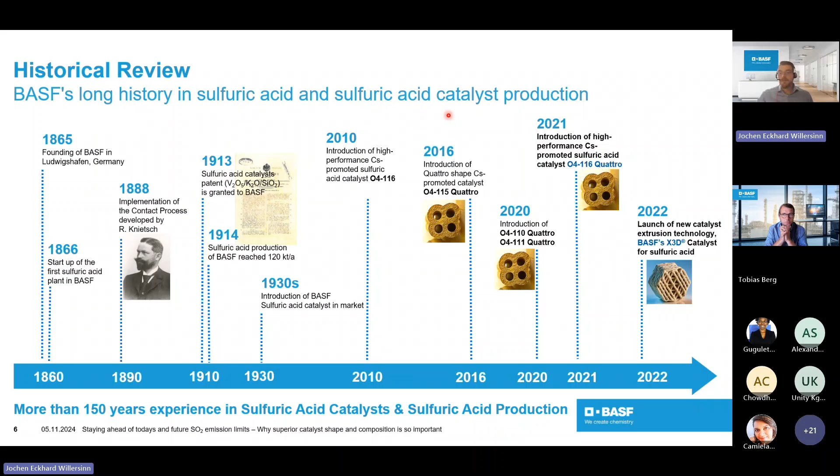So this is basically more than 150 years of experience in sulfuric acid catalyst and sulfuric acid production, which will benefit you to increase your capacity and also reduce your emissions.

Moving on, I already said we are a global company for producing sulfuric acid. You can see here where we are active in terms of sulfuric acid production. We have two sites, one in Germany, one in Shanghai, where we produce the catalyst for the sulfuric acid. And we have more than 13 sulfonation sites or sulfuric acid sites producing sulfuric acid for captive use only, all over the world.

And since this is about new geometries, I will mainly focus here on Quattro catalysts, so our high performance catalyst family. And basically the reasoning why we changed the shape from the star shape, you might all know, to a new shape is that there's different things to influence activity and also performance of a catalyst.

First thing, and this is quite obvious if you compare this to the old star shape catalyst, is the shape itself. If you change the shape, you will have a different performance of the catalyst. The shape mostly influences the pressure drop and the geometric surface area. So this is something where, if you change the shape, you always have an impact on your pressure drop in the plant and the surface area, which relates to the activity.

Secondly, what you can do to influence the activity is to work with the carrier materials, the material the catalyst is actually made of, for the majority. This is a material which is porous. And you can see here, depending on how porous the catalyst is, you have more accessibility of active sites and more surface area. But if you compare this maybe to a stone versus a sponge, when you have too much surface area, you end up where the catalyst gets brittle, so mechanical strength goes down.

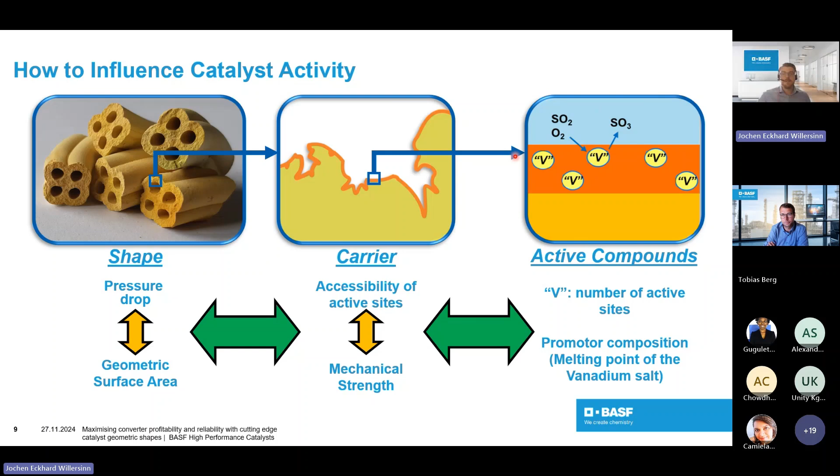So these are three things that could be regarded separately, but in real life all three of these topics are closely related. It's quite difficult to just change something and expect that all the other things will not change. But we figured out there is a way to make things a bit better with our Quattro catalyst. You need to figure out how this works in terms of geometry.

When you go down to this image here showing big M&Ms on the left-hand side and small M&Ms on the right-hand side, filled in a jar, this will be our model reactor, so to say. You have big catalyst pieces, you have small catalyst pieces, and we look at what happens during this reaction. For big pieces, you have a low pressure drop because there's high porosity, lots of void spaces. The gas can flow quite freely through this bed. You have a low packing density.

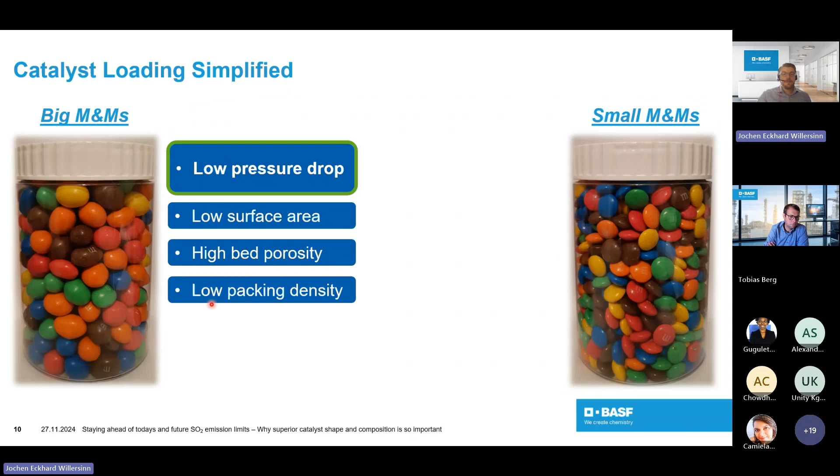You have a low surface area. This low surface area also relates to a lower conversion, because there's not enough active surface area which helps you convert SO2 to SO3. Small M&Ms on the other side have a high pressure drop because they have low bed porosity, a high packing density, so the bed is really tightly packed. There's much more pieces in here than in there. But because you have more, you also have a high conversion.

The point is, you cannot just mix and match and get to the ideal spot. If we want a catalyst with a very low pressure drop and a high conversion, we need more complex shapes. We need to move away from the standard shapes we knew before. We need to invest time and effort and R&D work into getting more complex shapes. This is what our Quattro catalyst combines.

If you see a historic overview of what was there before: the ancient pellets with a very high pressure drop but lower activity, moving on to the rings which were a bit better in pressure drop and activity, and to the old standard, which are the star rings. Our Quattro catalyst, with its improved shape and higher activity, managed to get to a significantly higher activity without sacrificing anything on the pressure drop.

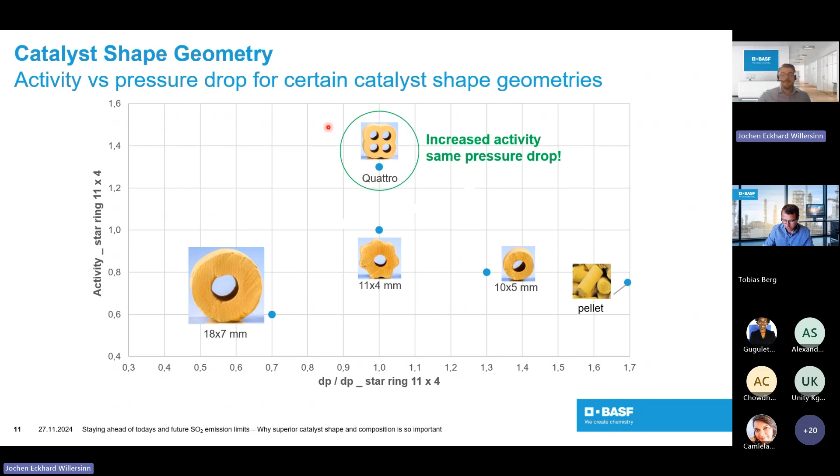So we have the same pressure drop for this catalyst geometry, but a significantly increased activity. And we didn't stop with just the activity. We also optimized our shape in such a way that the catalyst is even stronger. So I can summarize here what this catalyst is actually capable of.

We have a 30% higher geometric surface area, which means we also have much higher activity of the catalyst. More importantly, the side crush strength of this catalyst is increased by 50%. So the catalyst is much harder and is less prone to break. And we have a lower attrition.

That's quite easy to understand if you compare a ring like a star shape with edges, which can easily break off. This catalyst has a very much rounded shape, which is less prone to get abrasion. So we have 60% lower abrasion of this catalyst.

And the loading density is the same. This is also very important, so you don't need to buy more catalyst in terms of weight to get your reactor filled. It's the same loading density as our star rings are. And more importantly, also no pressure drop increase, which is a huge benefit. So the catalyst combines all the benefits without sacrificing on loading density and pressure drop increase.

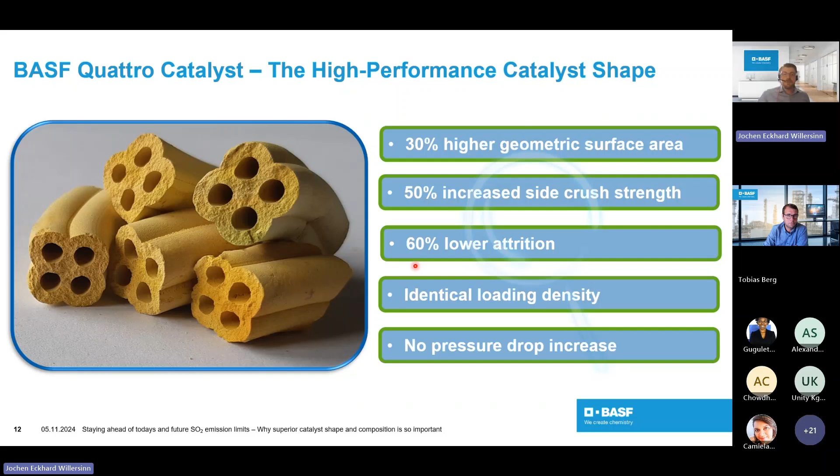Moving on. So with this technology, it's always important to show what this technology actually can do. I will focus here a bit on the improved geometry and what you can do with it.

This improved geometry gives you a higher surface area because you basically have more surface where the reaction can take place. This leads us to two different ways to benefit where the conversion equilibrium, the maximum achievable conversion of this reaction, can be reached at an earlier stage.

What this means for you: you can either decrease the bed height of the reactor and keep the same conversion because you have more active material present, which means you can reduce your catalyst amount and still have the same active material present for your converter bed. We've seen that we can decrease the loading of the catalyst by 10 to 20% and still keep the conversion at the same level as before.

On the other hand, you can also keep the volume the same as before, exchange your old catalyst with quattro catalyst, and increase the SO2 load, which means the capacity. You can run at higher SO2 loads and increase your capacity by 5 to 10%, provided your heat exchangers are capable of removing the energy. With this, you can increase capacity significantly without further changes, just exchanging the catalyst shapes from stars or rings to quattro, and have up to 10% higher capacity with your production.

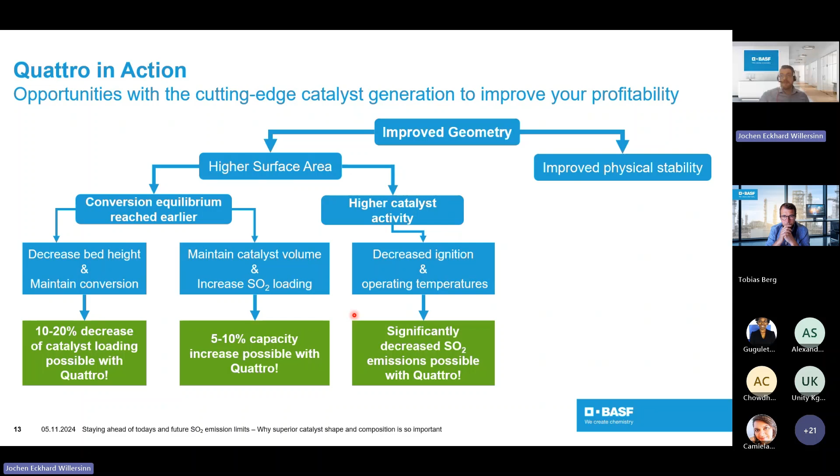On the right-hand side, the improved physical stability gives you less sieving losses, longer catalyst lifetime, less unplanned shutdowns because of pressure drop increases, and overall OPEX reductions due to decreased replenishments with the catalyst. So it's a very versatile catalyst and offers a lot of different benefits for you and your businesses.

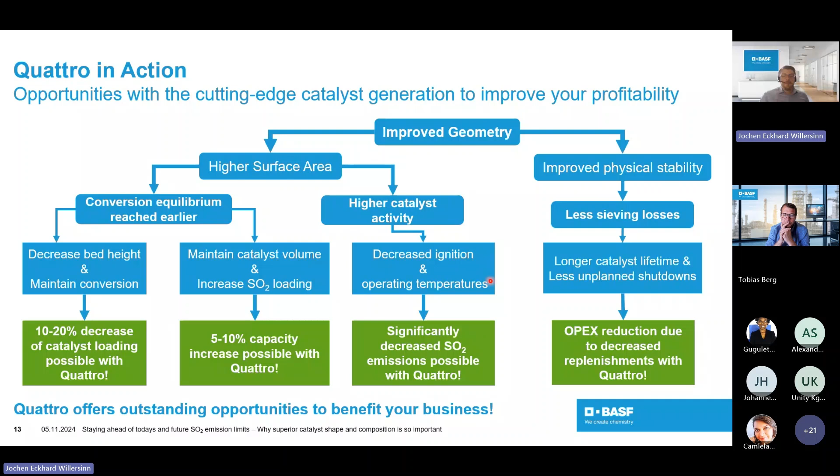And today, we just want to focus on the decreased SO2 emissions, which are possible with our quattro catalysts.

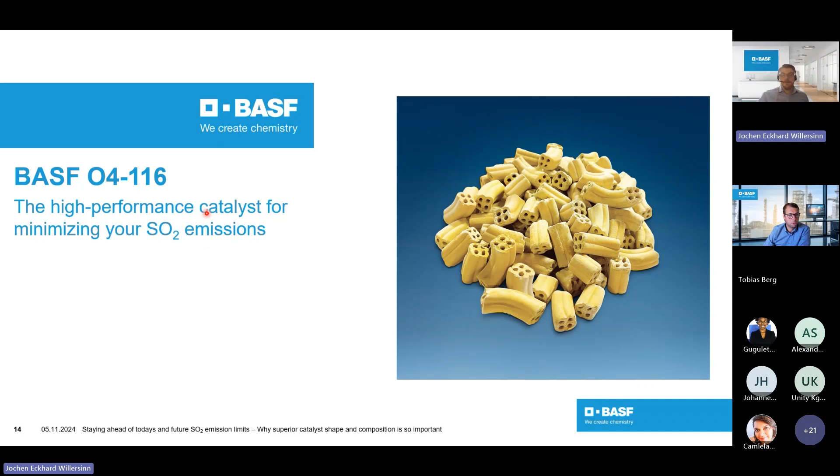Why is there a need for a more powerful catalyst? In principle, there are decreasing SO2 emission limits coming from governments, which is a key driver for converter improvements and catalyst improvements. The historic evolution was basically since the ratification of the Helsinki Protocol in 1985, the limit for SO2 emissions we are allowed to emit with our reactors is decreasing constantly. Especially in Europe, there might be even newer and stricter limits coming into effect by 2030, which means we need more powerful technologies to decrease SO2 emissions.

Here's an example of what was happening over the past 15 to 20 years in Germany. You can see, especially for single absorption plants but also for double absorption plants, the emission limit they are allowed to emit significantly decreased over the past 15 years, forcing plant operators and producers to invest more and further into their reactors.

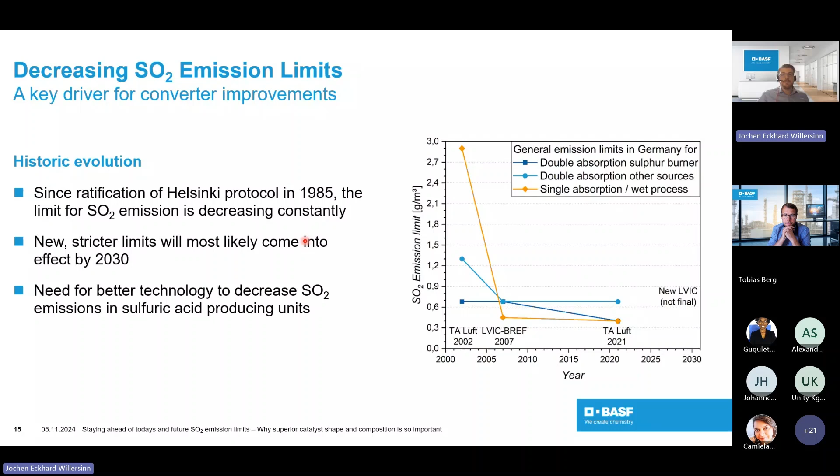Cesium catalysts here play a crucial role because we need to decrease the temperatures to get higher conversion rates and therefore lower emissions. So we need more powerful low temperature catalysts.

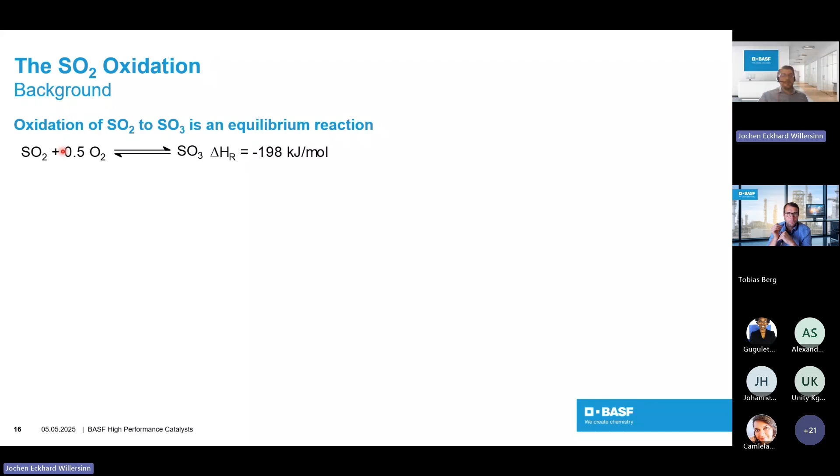And why do we need that? I'll give you a brief overview of the oxidation reaction. The SO2 oxidation is an equilibrium reaction, meaning the reaction can move in both directions depending on parameters, and the pathway depends on several factors: temperature, gas composition, and partial pressures.

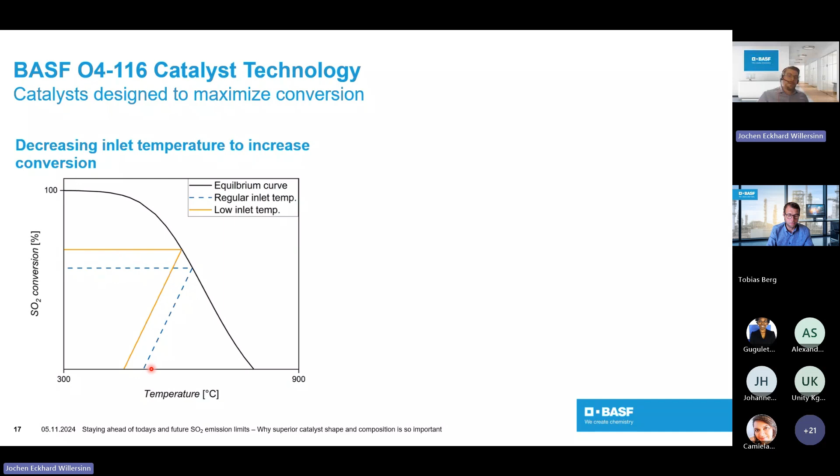For this, we need a catalyst designed to be operational at low temperatures to increase conversion. If we see a catalyst operating at a normal temperature, let's say 420 or 430 degrees, you'd have this exothermic reaction, SO2 getting oxidized to SO3 with the catalyst, and you end up with a conversion of roughly about 60%.

But if we reduce the temperature of this reaction to 390, 380 degrees, you see the same exothermic reaction, temperature increasing, but it takes much longer to reach equilibrium - the state where the backward reaction to SO2 and oxygen is as likely as the forward reaction to SO3. We end up with a significantly higher conversion rate for this catalyst. So having a lower inlet temperature is key to minimizing emissions.

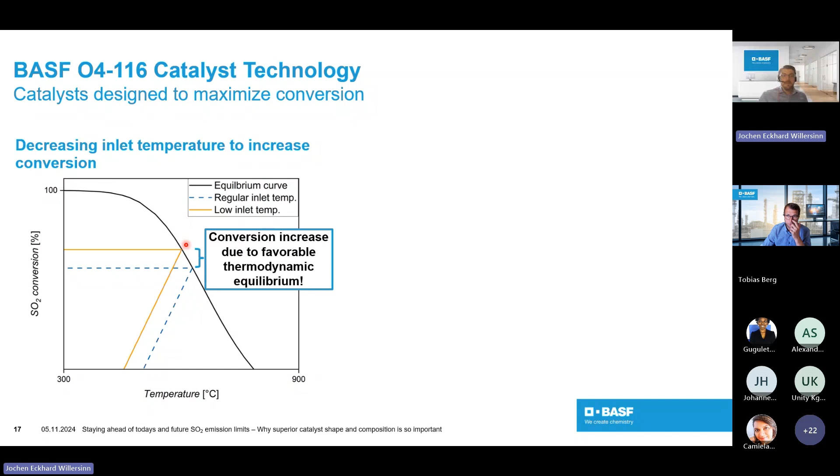Basically, what we did with our 116 catalyst technology to achieve this: we increased our vanadium content and improved our promoter mixture using potassium and cesium. Cesium is a key factor to reduce the operating state of this catalyst to below 400 degrees centigrade, and we optimized this mix to ensure the highest activity and conversion at low temperatures.

What we also did is significantly improve the carrier composition, so we have higher porosity and pore size distribution, meaning a higher mass transfer rate at very low SO2 concentrations. This is crucial after intermediate absorption steps where you have very low SO2, high oxygen, and no SO3. The limit of this reaction is not just thermodynamics but also kinetics - the gas moves into the active phase, reacts to SO3, and then gets carried out of the active phase.

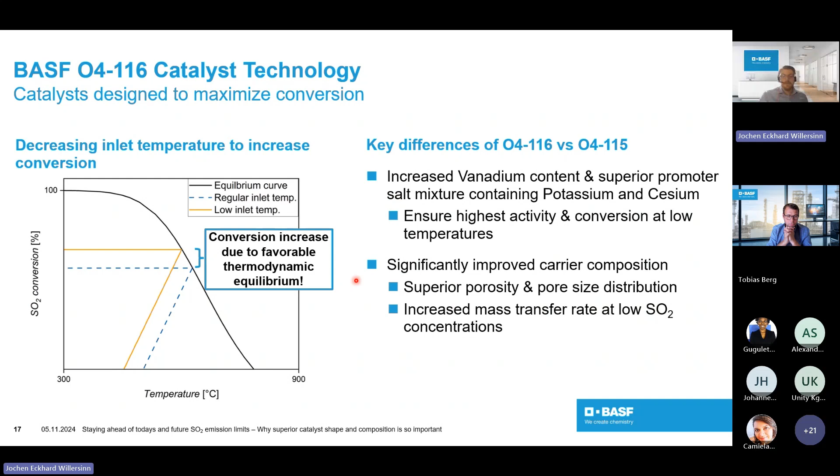Just to give you a sense of what it means to have a different pore size distribution or different carrier material, I was looking for a nice example. Surface area and porosity is quite interesting when you look at volcanic rocks. I had the pleasure to be in São Miguel in the Azores last year and found some very interesting rocks that nicely visualize what I mean by different surface area and porosity.

When we look at this lava rock 1, you see it has a rather smooth surface. You see some big pores here, but a very low amount of small pores. Surface area overall is quite low because we only have some of the big pores. This piece of rock was actually quite heavy and very robust.

On the other hand, this is the second rock I found on the same beach, and you can see already a stark contrast here. This is very open-pored, very rough, has high porosity, high internal porosity with a lot of pores inside, very high surface area going into this rock, not just on the surface. This piece of rock was very light - maybe a fifth of the weight of the first one. So very light material, very porous, and had a very high surface area.

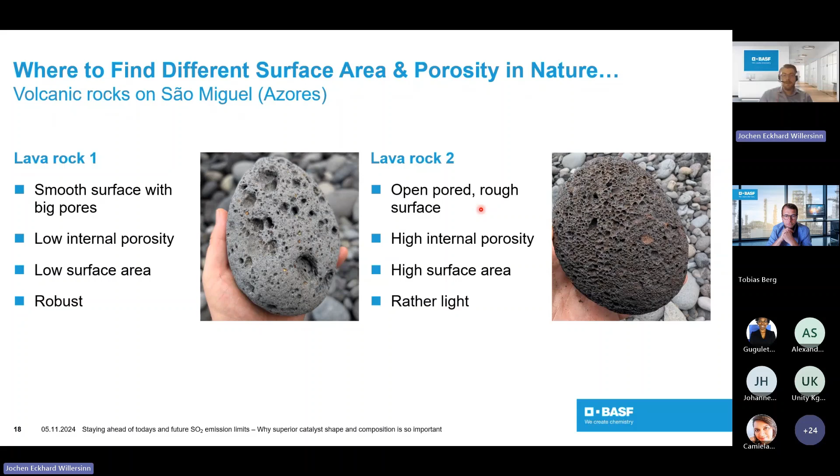Both of these are the same origin - they're both lava. The difference is how fast the lava was exposed to water and the exterior gases. The enclosed gas bubbles either agglomerated and moved out, which is why you have these big holes, or they solidified immediately and you have a lot of small cavities from the small gas bubbles.

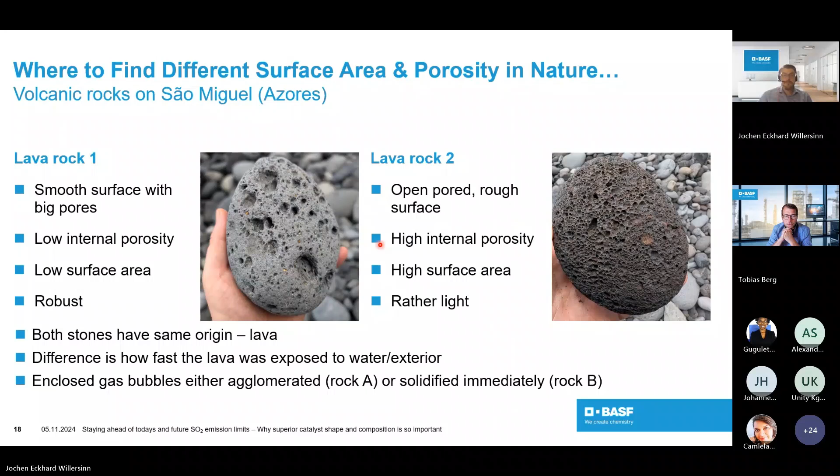With this example, how can we translate this to our catalyst? We need to look at our diatomaceous earth, the carrier material, which is important for our catalyst properties. I have three examples for you of diatomaceous earth as a natural product.

These are actually fossilized shells of silica algae in various shapes. They come from prehistoric times and are mined. They can have very different shapes - the shapes I show you here are disc-like, rod-like, and cylindric shapes. Depending on how you combine these shapes together, you can have a significant impact on key catalyst properties, which is very interesting.

So the way you combine it, you can increase your strength. You can change your operating temperature, make it higher or lower. You can change the surface area, which is quite obvious here because you have a lot of different porosities. And you can change the activity, which is closely related to surface area and porosity.

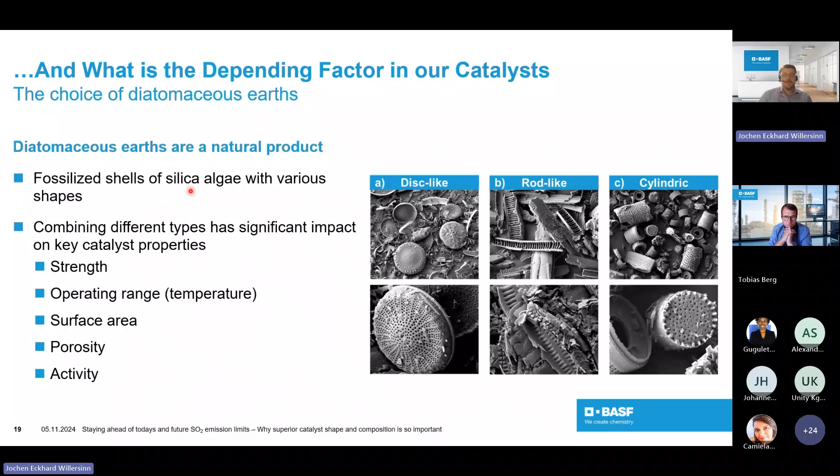And if you combine these key figures smart, you will have a catalyst that has a high activity at low SO2 concentrations and low temperatures. And this is what our O4-116 looks like.

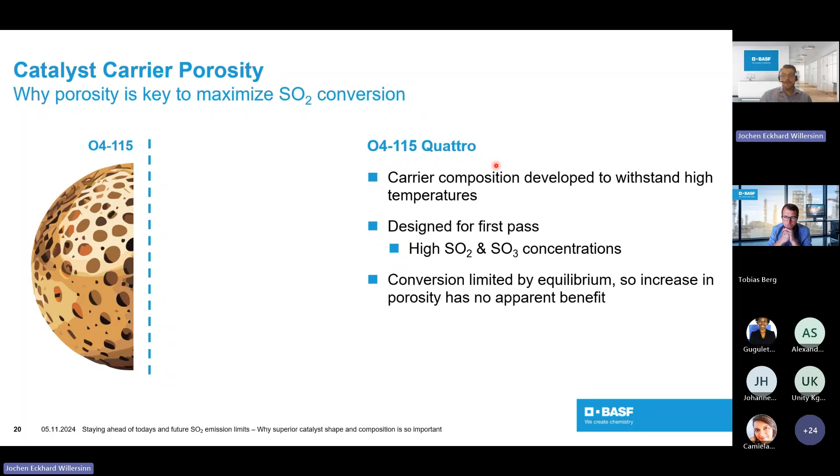And when we now compare this to old cesium-based catalysts, which were designed to be very sturdy and be able to also operate on the first bed at high SO2 and high temperatures, the carrier composition here with the O4-115 was developed to withstand high temperatures, first pass, high SO2, high SO3 concentration. The need here to have a highly porous and active catalyst is not so high, because the conversion limit is actually the equilibrium, the temperature range, not how much gas we can get into the active surface and out of it. So having an increase in porosity has no benefit.

On the other side, the 116 Quattro, we designed for the applications after the intermediate absorption step, where SO2 is low, we have very low SO3 to none, and we have a high oxygen ratio. The conversion here is limited by the rate of diffusion of the reactants into the active mass. So the structure of this catalyst has to be more favorable for internal mass transfer. We need it to be easier to get the SO2 and oxygen into the surface and the SO3 out of the surface as fast as possible.

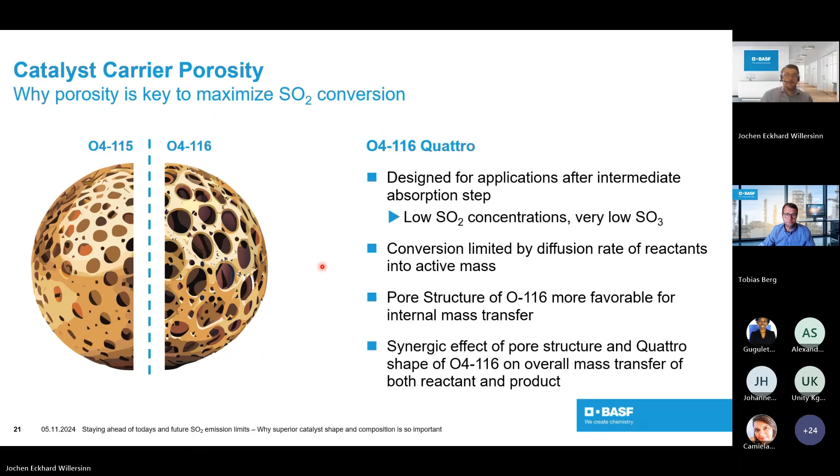And with our recipe and also with the benefit of Quattro, we observed that we have a synergistic effect of those two, which means that the mass transfer and also the activity of the catalyst is significantly higher than you would just look at the two things separately. And this is something you can see here already.

It's a lot of numbers, but when you compare our standard star ring catalyst with the high performance Quattro catalyst for the 115, for the standard cesium promoted catalyst, you already see with this higher surface area, you get a decrease in your ignition temperature for the 115 by 10 degrees, down to 330 from 340. And the operating range decreasing to 375 up to 630. So this is a significant decrease in the operating range.

Same here is true for the 116 Quattro, but to a much more extended state. So we can even decrease the ignition temperature down to 320 degrees centigrade, and further decrease the operating range to 365 degrees centigrade, which means the catalyst is active and does actively convert SO2 to SO3 at this low temperature range.

And in summary, the superior carrier material composition leads to this higher activity. We really optimized this catalyst for low temperature applications, which you can see here, it's very low. The ignition and operating temperatures of the Quattro catalyst versus the star rings show that there's a synergistic effect. So from star ring to star ring, you just have a 10 degree reduction, whereas when you go from star ring to Quattro, you get 15 degrees.

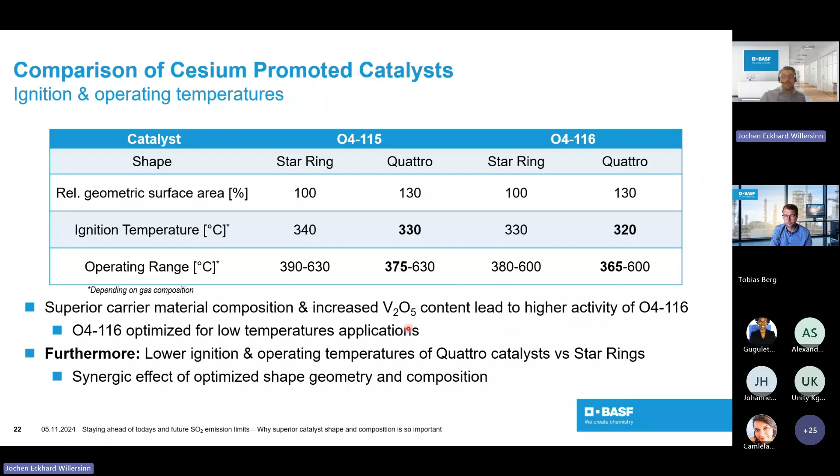Good, and how does this pan out in terms of kinetic rate? So we can also see for the Quattro catalyst, at lower temperatures we see a higher activity versus the 115, at very low temperatures between 20 and 40%. So the catalyst is significantly more active at much lower temperatures than the standard cesium catalyst would be. At higher temperatures, this is leveled out a bit, so we're just down to 15 to 20%.

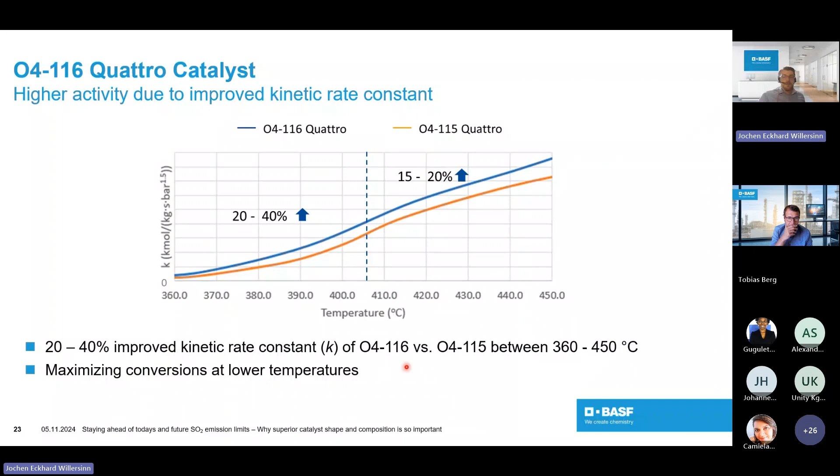This is because of thermodynamic contributions, making it a bit less pronounced. But overall, we can say we have up to 40% improved kinetic rate, which means this is maximizing the conversion at low temperatures.

Good. Before I go to the example, are there any questions about the 116 Quattro?

We have received one question, but actually, Jochen, you already answered it. So it was about the strike temperature, but you referred to that already. Consider this one done. And then I just received another one.

What was the gas composition for the kinetic data on slide 23? I have to look that up. Usually we do this at a composition of, I think, 7% SO2 and 10% oxygen, something like this. Okay, thank you so much.

This is it for now. Okay, good. Then let's move into the example where we're showing the emission reduction upon plant startup. I'll talk a bit about the details. This is a double absorption plant with 4 beds, with an intermediate absorption tower after bed 2, so a DA22 unit. It's a zinc smelter in Europe.

We have a rough daily capacity of 1,080 tons per day. Average gas composition is around 130,000 norm cubes, bit below 8% SO2, 10% oxygen. Target conversion of this reactor is 99.9. And the important thing here, especially in this part of Europe, they have an annual emission limit contingent.

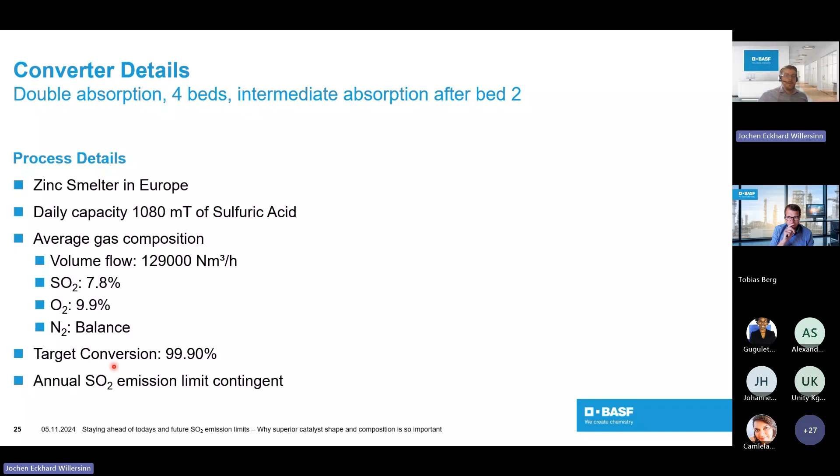So they have an amount of SO2 in kilograms they are allowed to emit. If they exceed this, they get into trouble. And as we all know, startups produce the most amount of SO2, so the goal is really to reduce the emissions upon startup after shutdowns, which are hot or cold. During this project, we decided to implement a cesium layer in the third bed to decrease the emissions upon startup, to really go down with the emissions.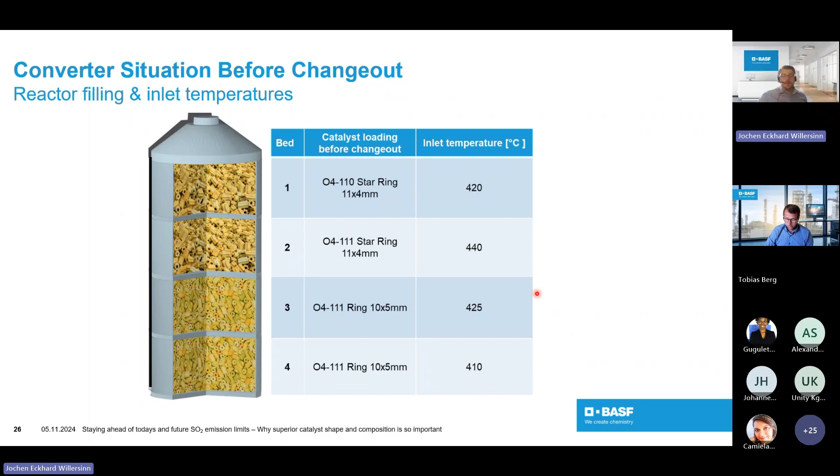When we look at some of our performance measurements that we did in Jan 2022, we could see that basically we achieved a conversion of 99.89%. And we could see that performance in bed 3 was not so good, as well as bed 1, but this is basically because of the age and should be exchanged in any case. So we recommended an exchange of bed 1 and 3 to regain the performance of the unit and to go with the ignition layer in bed 3.

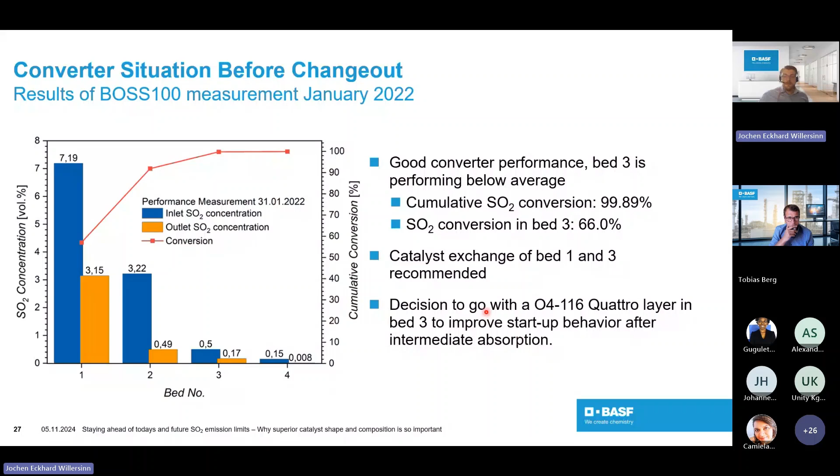And this is what the plant looked like afterwards. So what we did, we put in a fresh layer of fresh set of catalyst in bed 1, and we also replaced bed 3 entirely. The majority of the bed, 70%, is still 111 Star Ring. Why didn't we go for Quattro here as well? Because we really wanted to see just the benefit of the 116 Quattro, and not have it overshadowed by the other Quattro catalyst. The remainder, bed 2 and 4, remained the same.

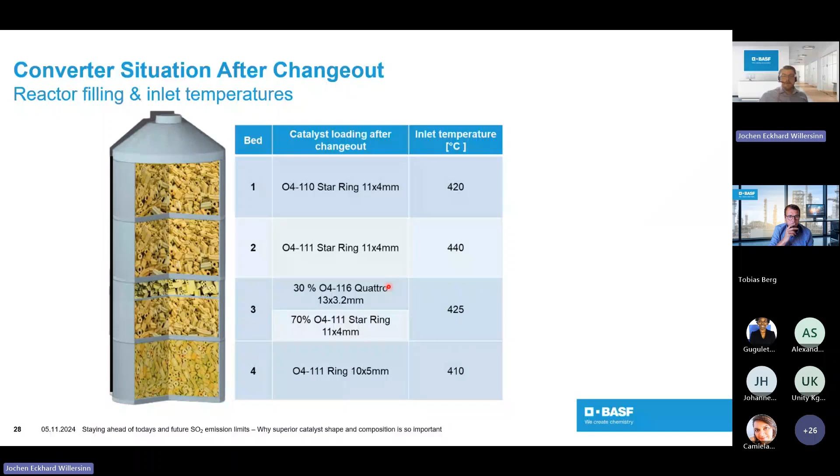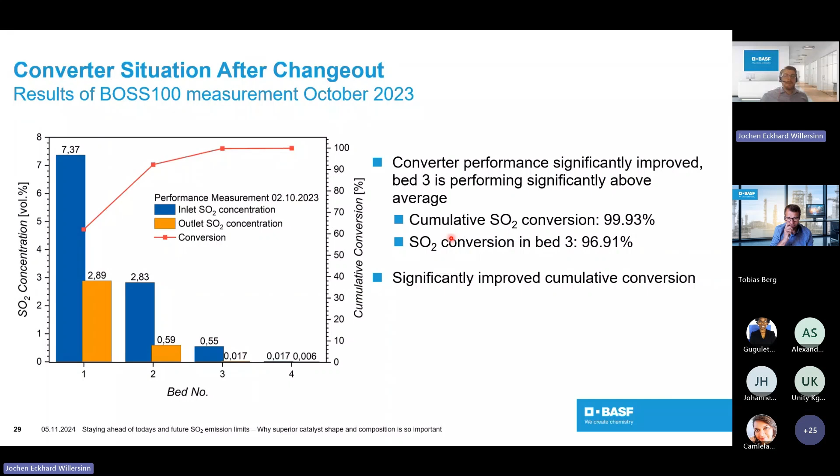After the change out and after almost a year in operation, we did some performance tests again. And what we could see here already, the exchange had a significant impact. The conversion overall increased to 99.93, and the conversion bed 3 was 96.91. So we had a significantly improved cumulative conversion, but also the separate conversion bed 3 was very, very high, which is good. But it gets better when we look at the startup behavior of this reactor.

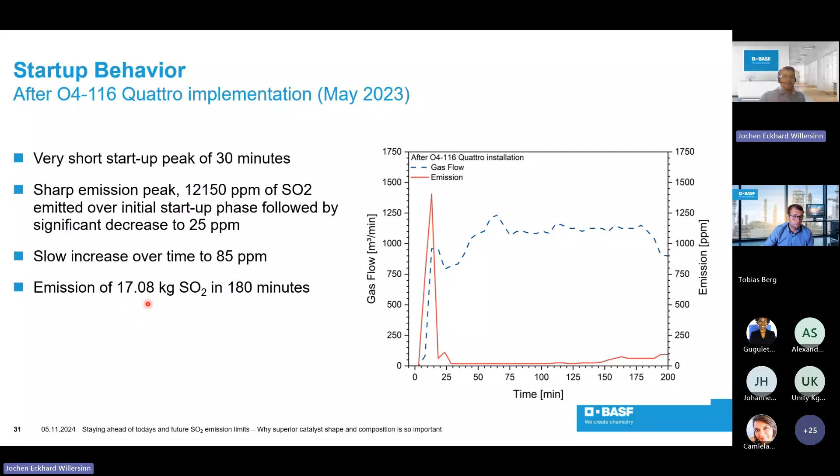So we could see that directly after the ignition layer in bed 3 kicked in, we could catch the emissions down to a level significantly less than before. To sum this up, we only had an emission of 17.08 kilograms in these 180 minutes, which is a significant decrease in emissions.

So when we compare those two different startup behaviors before and after the exchange, we can see that the emission reduction over these two periods of 180 minutes was decreased by 82%. Relatively, 77.6 kilograms of SO2 could be avoided from being emitted to the atmosphere, which is a great benefit and really helps the customer get down to the emission limits.

Furthermore, what we could see here is that this third bed displays significantly increased activity at 350-degree inlet temperature. So when the plant was started up, we could already see significant activity in bed 3, which was not observed in all the startups before. So also the contribution at this very low temperature made it possible that the reduction in SO2 emissions was so significant.

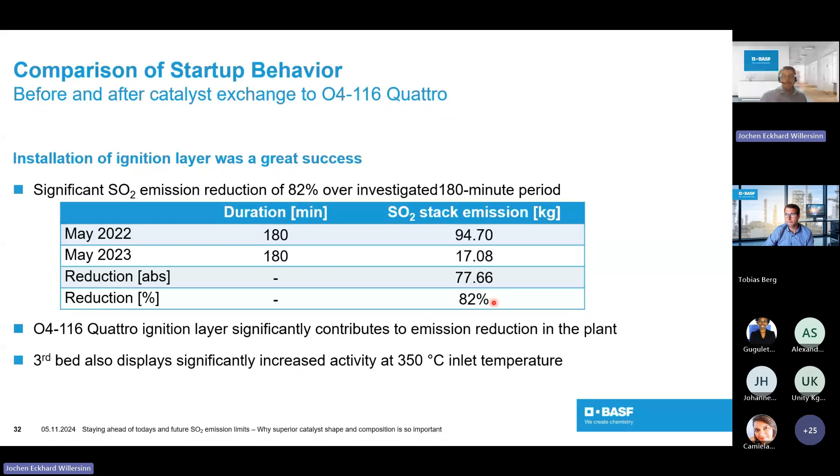Good, let's sum it up. So what we could do here in this exercise was successfully implement our 116 Quattro catalyst as an ignition layer after intermediate absorption. We could increase the conversion up to 99.93%, and the most important thing is that we can decrease the startup emissions by up to 82%.

For the client, he's very satisfied with this result because it's a major contribution to tackle his emission targets.

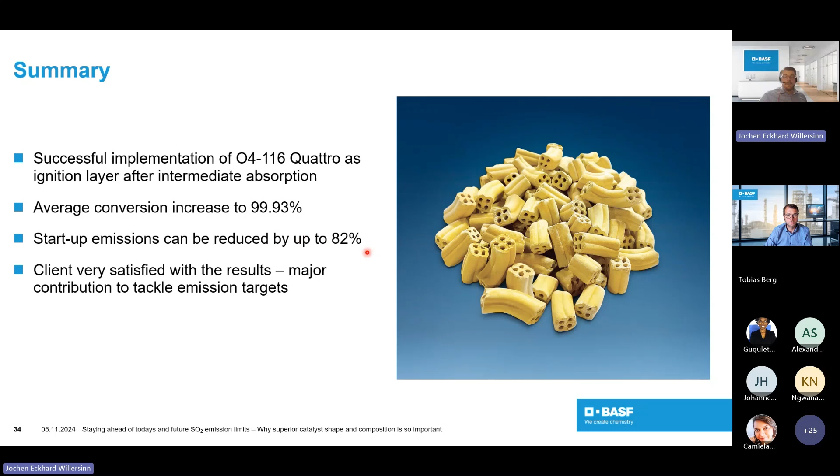One thing I have to say here, this emission reduction is of course also only possible if you have good startup procedures and you stick to them as best as possible, because if you start the gas when everything is below ignition temperature, you will not get to this emission reduction. So you also need to have your operational excellence really on top to get this down to these low levels.

And the part is, I mentioned at the very beginning of my talk that we didn't stop with the Quattro, and here's some interesting outlook for you to see how we intend to further decrease startup emissions using our new X3D technology. Basically, this catalyst is a cutting-edge shape based on 3D printing technologies.

What you can see here when you compare our 116 Quattro with the X3D technology, we have an even higher surface area, a significantly lower pressure drop, which can be very beneficial for increasing your operation runs. The ignition temperature is even 10 degrees lower, and the operating temperature drops down even further. So this is even better for decreasing startup emissions, or having this catalyst as an ignition layer after intermediate absorption towers, or even at the first bed.

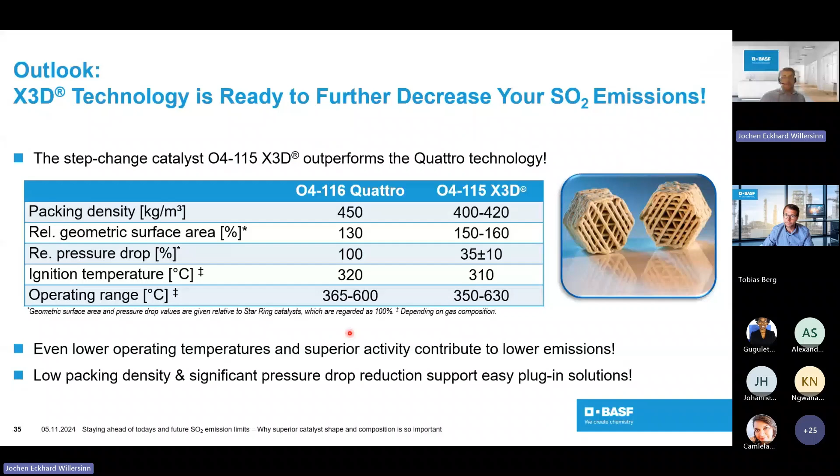And I wouldn't just tell it because we have this nice R&D activity. Basically, this catalyst is reality. We are building a new production plant which will start up in 2026 and will deliver this catalyst at large commercial scales. And with this, I'm at the end of my talk.